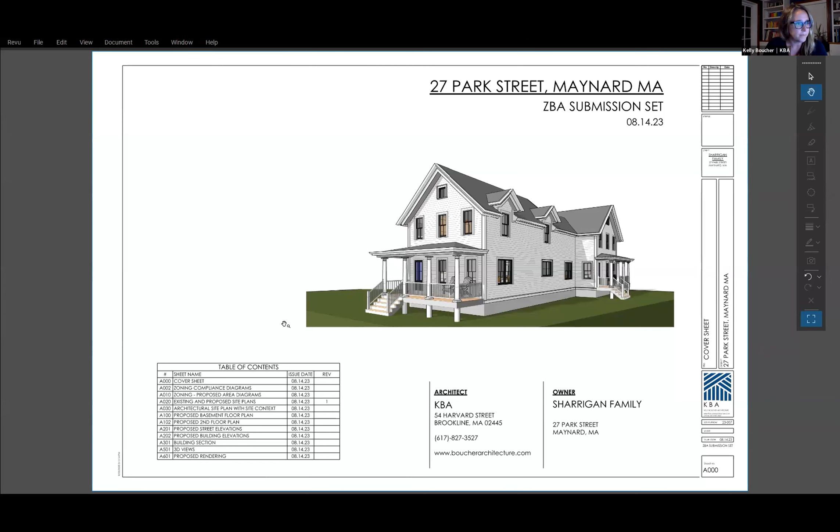So I'm going to start just with a quick zoning review. As you probably all already know, the house at 27 Park Street suffered a catastrophic gas explosion a few years ago that left the house fully almost demolished. It's still there now, but the Sharrigan family has spent a little bit of time working with their insurance agency and all the other parties involved to work out how to build the house back. Now that that's been settled, we're here to present a project to you today.

The existing house was a single family, and it was located at this same corner, 8.3 feet from Park Street and 12.4 feet from Sherman Street. The project that we're proposing to put back uses that same street corner that the house sat at before as the corner of the house. We're hoping that we can reuse the foundation in some places, although the main structure is damaged beyond repair and is not able to be reused. So it'll be new framing, a new building above.

And in looking at the lot, what we are proposing is, besides these two existing non-conforming setbacks, a two-family project that otherwise meets all the intent of the zoning ordinance. So the existing driveway and curb cut remains. The existing garage, which was undamaged by the fire, also remains. And what we're proposing is an attached two-family with one unit that faces Park Street and one unit that faces Sherman Street.

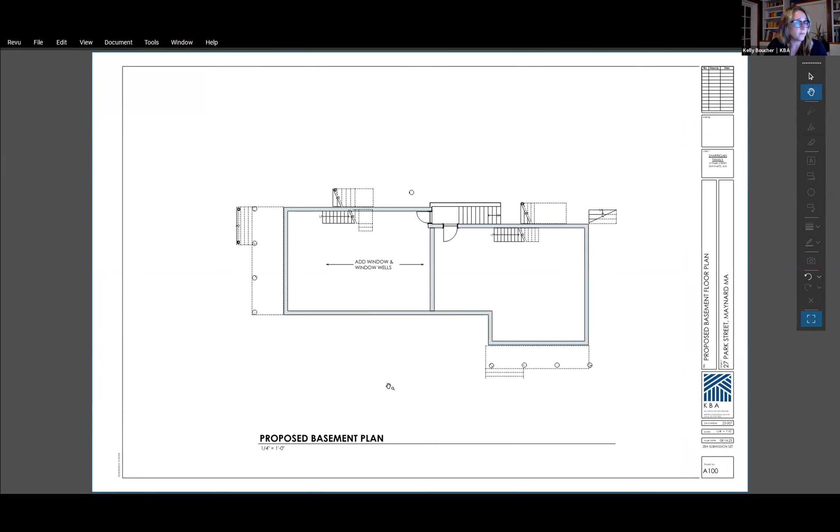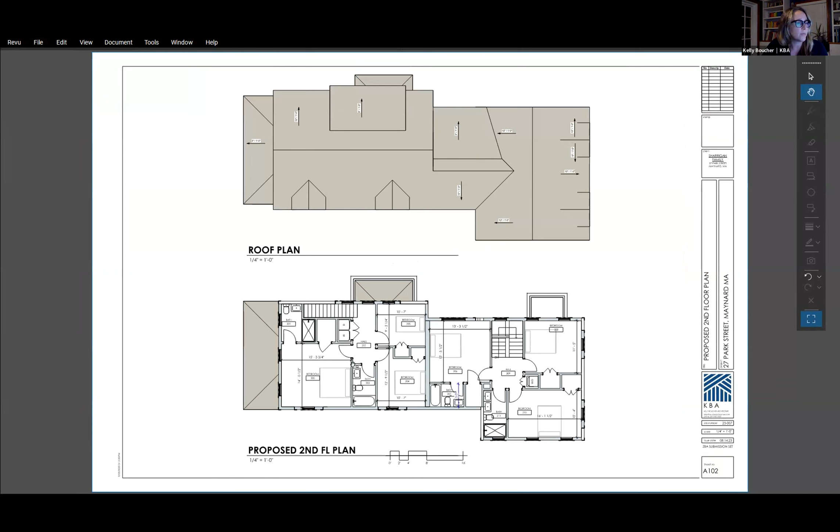We have basement plans, first floor. Each unit is a three-bedroom, with a single family house feel, with all the living space on the first floor and bedrooms above. Here's our roof plan. So 3 bedrooms for the front unit, 3 bedrooms for the back unit.

And here are the elevations. So this on the bottom is what the property will look like from Sherman Street. Here's the front door for the Sherman Street unit, and above is what it will look like from the Park Street side. Here's the existing garage, and this porch is the front porch for the Park Street front unit.

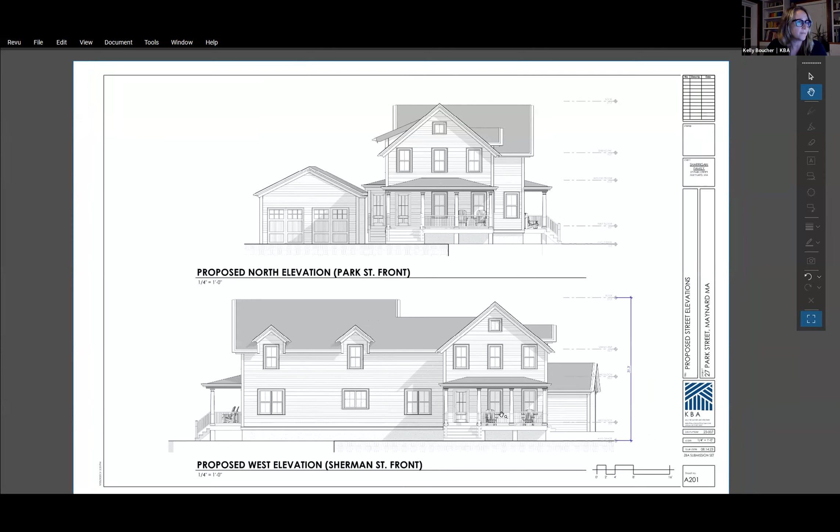We've got the back and the driveway side elevation here. Very residential looking property. A building section and some 3D views of what it will look like, although you won't really get this view much in real life. It's kind of up in the air.

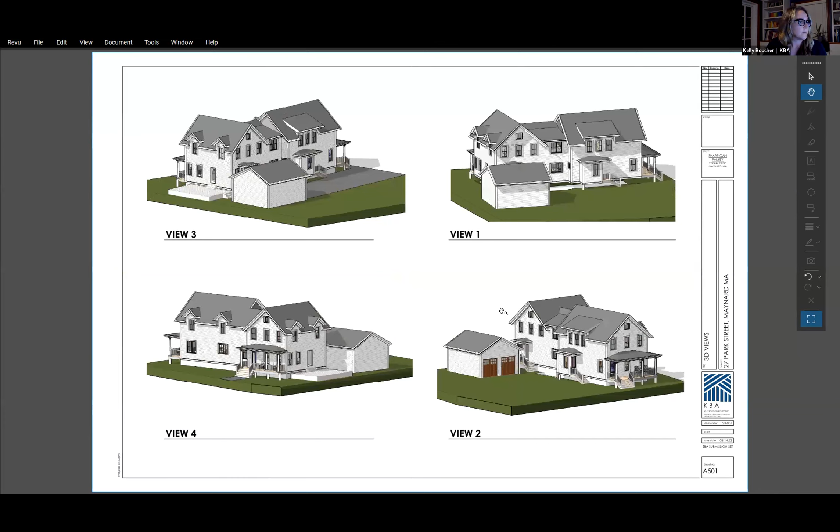So that's what we're looking to do. I'm happy to answer questions about design or zoning or intent. I'll leave it up to you.

All right, and all you're requesting is that setback? Yeah, the building meets requirements for unit count, lot coverage, open space, and parking. Our curb cut is existing. Our side setback on the Sherman side is conforming. We're proposing 17 feet where it requires 15. And then there's actually plenty of room on the other side of the driveway at Park Street, which maintains the lot much as it is today, where that is really the yard for the house. We're trying to leave that the same condition after we rebuild.

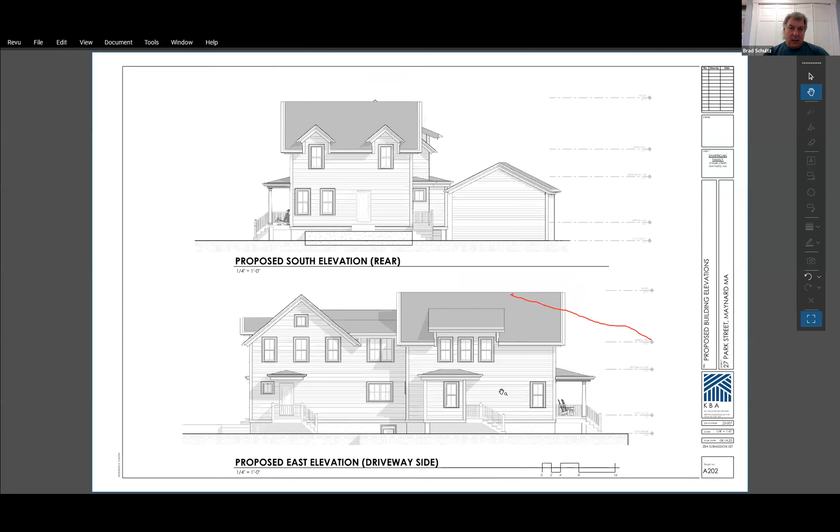Okay, on your basement plans, do you have a ceiling height, or a basement depth I should say, of what you're proposing? I didn't see anything on there. So in the end, we try to get the basement at 7 feet, although we're not planning to use that as living space or bedrooms, it's really just storage. The plan isn't to finish it at this stage, but to leave it as a basement. I don't have the exact answer for you as to what that height is, mostly because I didn't go down and measure the existing one beforehand.

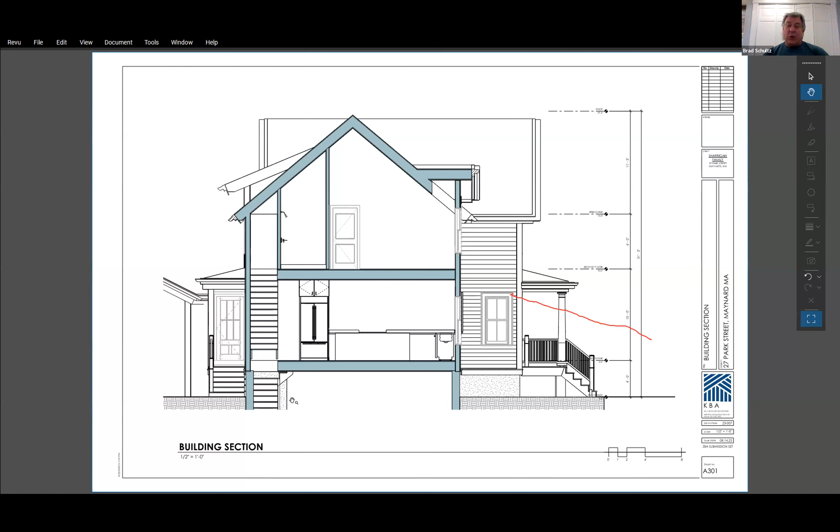Okay, so I guess what I'm getting to is, in the event that you basically have to tear out the foundation, which I imagine you're going to have to, you can make it to the depth you would desire with a poured concrete foundation. So basically you're going to have a very large hole there that you'll pour, starting from scratch, from basically a brownfield, putting in a completely new building. Is that, in essence - yeah, this house is not salvageable.

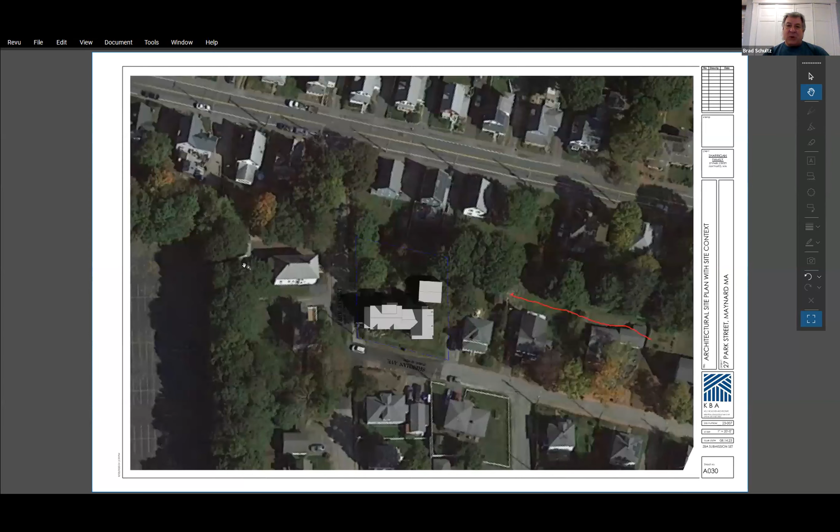So if you're starting completely over, is there any way that you can bring the property or the building back into conformity with the lot? Because you have an 11,000 square foot lot, which is a pretty large lot for Maynard. It seems like this would be the only opportunity to make it a conforming lot, a conforming building on the lot.

The answer is that if we did put a conforming structure on this property, it would be in the middle of the site, which would mean we'd need to rework both the curb cut and probably not be able to save the existing garage, which was one of our goals of the project. It would also make us much closer to our neighbors on the Park Street side.

So to hear where the house is already situated is the least impactful to the abutter on this side. Okay, and the other question I have is the Sherman Street unit. Are you having a curb cut there, or I see you're having steps and an entrance? That's just a pedestrian walkway to the front door, not a curb cut. The Sherman Street unit will park off of Park Street, and then they can get to their unit through their back door, which is next to the driveway.

Okay, and will that have a Sherman Street address? I would imagine that it would, although we didn't get that far for sure yet. Those are assigned by the DPW, right? Yeah, exactly. Sometimes by the post office too, but either way, that's a little further down the road than we're at during our planning stages right now.

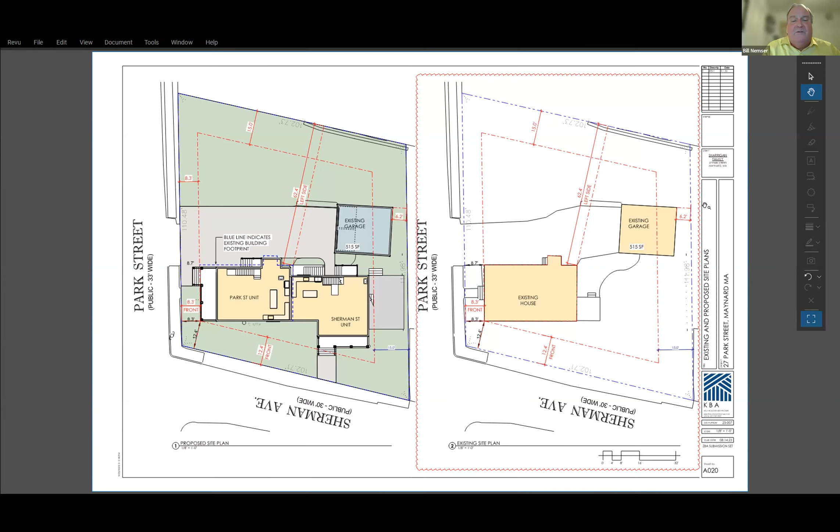And as far as Sherman Street, I'm not sure I quite understand where the... you're saying, maybe I misunderstood it, Paul, but you're saying you thought there was a new nonconformity created? Sherman, right, where the Sherman Street unit is, right there where the mouse is wandering around. Right, that, yes, it's within the same event, but it is significantly different than extending a wall a foot or so along an existing nonconformity. It's significantly bigger than just a foot or so into the setback requirement along an existing wall, which is what we've seen on several cases in the past.

I don't disagree, but I would say that we have a required 25-foot setback, and there was an existing encroachment in that setback. What this is doing, the board can decide if it's too much or not. But I think in the spirit of the interpretations, and what for all intents and purposes is court precedent, it would be an encroachment into an existing nonconformity and thus a special permit. That would be my... Right, I'm not arguing a special permit, that's fine if that's the way we need to go. But I'm looking at the amount of encroachment there that is away from where the current encroachment is, and it's a big event.

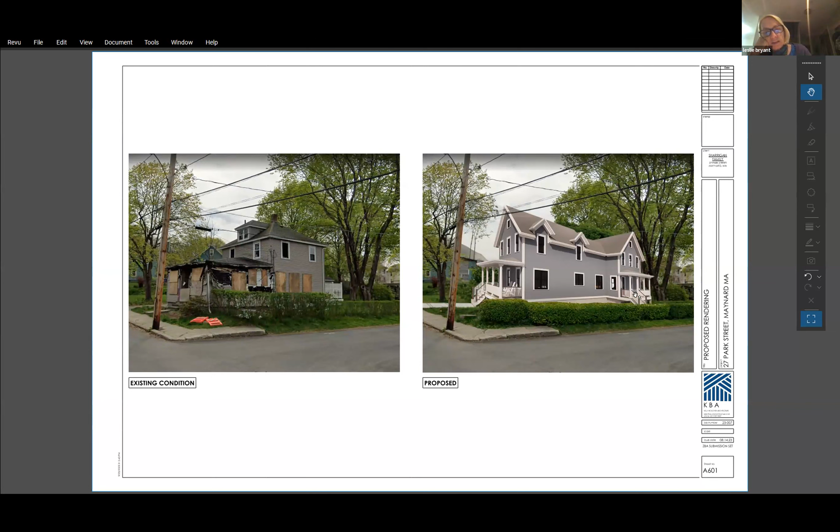I wouldn't discount the fact that Sherman Street, you're not abutting another person's house, you're abutting a street, which makes this naturally a larger distance. The spirit of the regulation is kind of upheld by the fact that you've got a whole street between you and the next property, in my opinion. And our abutter on Sherman Street is even, it's also in that sort of 12-foot line. Their house comes quite close to Sherman Street too, so we're not going to be out a lot further than they are volume-wise as you pass the street facade on that side. Okay.

So I pulled up the, what does Bill affectionately call it? The staff report. And affectionately call it 'stuff', yeah.

You have listed six characteristics that we need to consider: social, economic, and community needs, traffic and parking, public services, neighborhood character, impact on the environment, and fiscal impact. Is that correct, Bill? I thought there were seven, but okay. Yes, I only counted six. All right, you're right.

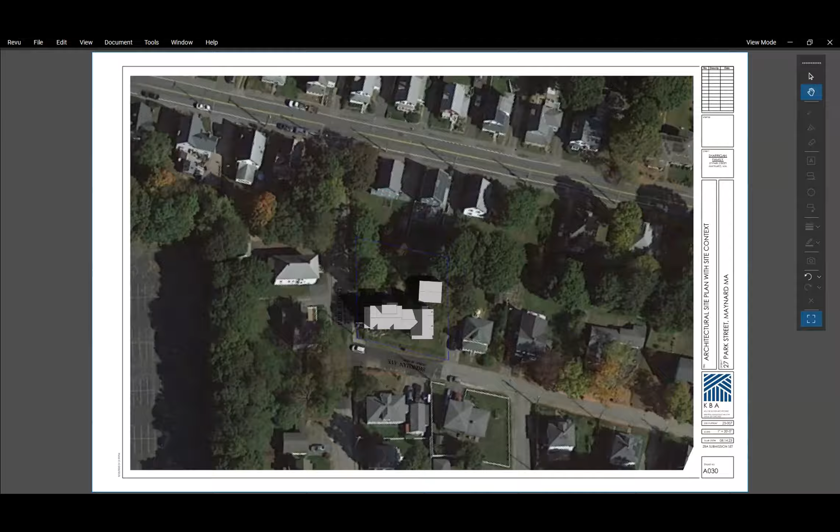So I think that the plans that Jason has put forth really conform to what is already existing in the neighborhood. It's not any closer to the road. And I think for the family, it would be wonderful to be able to keep the garage where it is and how Greg built it. Thank you, appreciate the comments. Anybody else want to speak in favor of the application?

Does anyone want to speak in opposition to the application? The silence is deafening.

So, Bill, what's our protocol now? I just want to make sure I do it right. We should close the public hearing. Have deliberations, I can pop up what we're deliberating on the screen share. But I would say close public hearing, and I think we have all the information, unless the board wants anything else.

That's a good point. Does anyone on the board have any additional questions? I guess I do, go ahead Brad. I have one. Is the plan for this to be an owner occupied property, not necessarily just a rental, or maybe changed, put into condos?

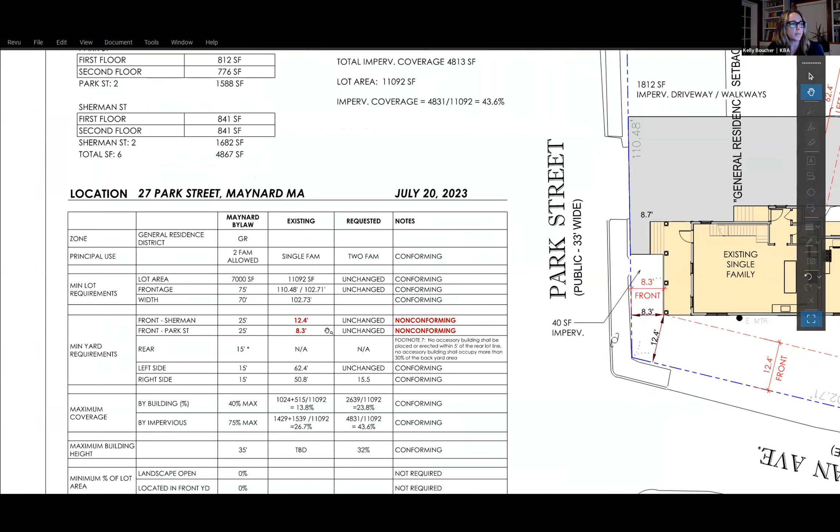So we're looking for a setback. If I can go to that page, their specific request is to go to that diagram. I'm looking for the setback request. Kelly, you can pull that up if you want. Sure, I have it open here. You're going from 25 feet, to 25 feet is what's required. Existing on Sherman Street is 12.4, and we're not looking to change that. That's a nonconformity. And on Park Street, we're at 8.3, and again that's an unchanged, non-conforming existing setback.

Okay, I would challenge it's unchanged on Sherman Street, because you're putting an additional event down to that. So you're extending the nonconformity on Sherman.

My suggestion would be, Mr. Chair, if perhaps the easiest way to do this for the board would be to allow an extension of the existing nonconformity up to, I don't know, what would it need, Kelly, there to be? You're talking about the stairs, where the stairs end there? Oh, are you talking about this little piece, that's Paul's stairs talking about, right? No, oh sorry.

You've got a 25-foot requirement. You're beyond that on the front, on that Sherman corner at 12.4. So you're moving from the 25 down to 12.4, in not an unchanged but an extension of the 12.4 on the front at the corner of the intersection. So you're extending. It's not a requested unchanged, it's a requested extension of the 25 down to 12.4 to get that corner of the Sherman Street porch.

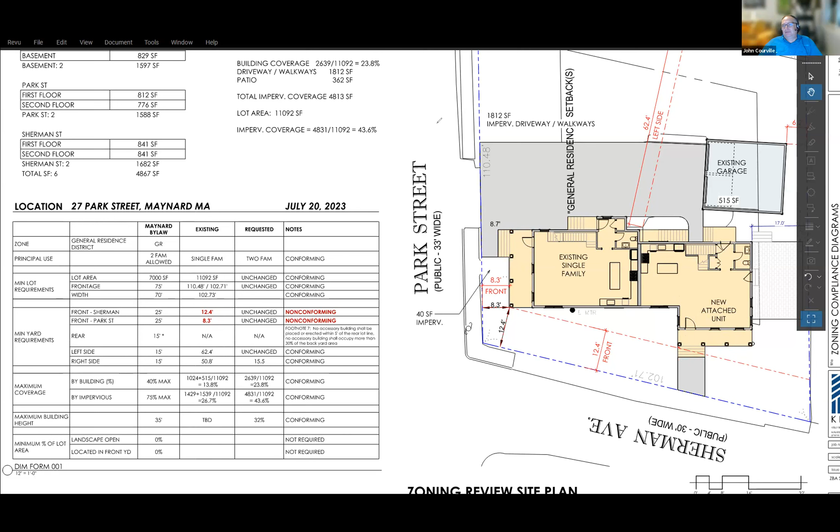Oops, sorry, which is this? It's the same size porch as this one, actually. I think maybe it's the steps that are throwing things off since they're the same color. Yeah, that's what I think. It's not building there, that's the steps, this column. Gotcha, let's see, let me get out of this, see if I can. Here, this post is at the 12.4, this one right here, and these steps are beyond, but they're not covered, there's no roof over them. They could be done out of even stone, they don't have to necessarily be wood construction, they could be sort of landscaping.

This porch is the part that's at the 12.4. So to go back to my point, what I'm trying to articulate, John, is it is not that it is unchanged, it is changed. It's an extension to put in all of that stuff on the Sherman Street front. And so I'm just talking about the phraseology in the request, because if nothing is changed, she doesn't have to be here. The point is, it is being changed to put in this additional nonconformity, extending it from that corner intersection there on the corner of Park and Sherman.

Would it help, Mr. Chair, if the applicant, so if they're going to extend the existing nonconformity, and I'm sure Kelly can come up with a number that is not to exceed, would that be acceptable? Well, the 12.4 she's been saying, and I'm fine with that. What I'm just clarifying is it's not an unchanged event, it's a new nonconforming within that 12-foot setback elsewhere on the property, that's the Sherman Street front. So all I'm debating here is the terminology, that it is an extension of the nonconformity, not that it's unchanged.

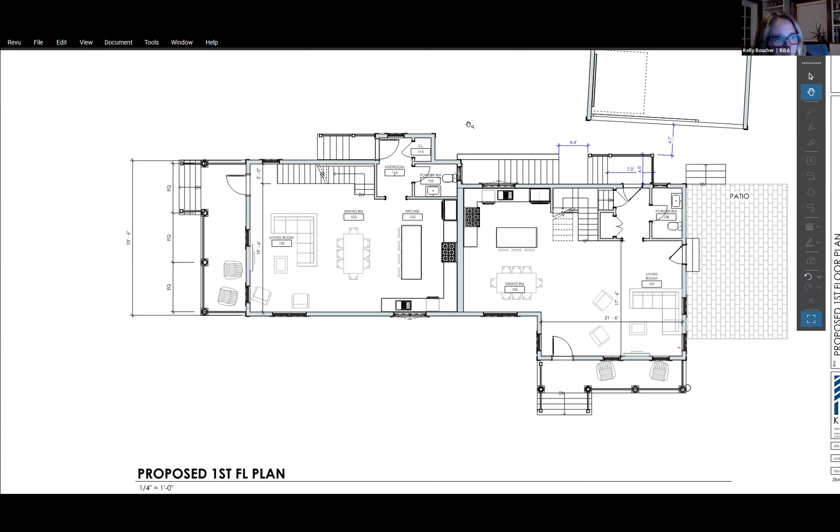Because if somebody reads that and says, why bother being in front of the zoning board because nothing changed? Well, something did change. It's a new or an extension of the existing nonconformity. So we're proposing a new addition, non-conforming for front setback, that is not a greater non-conformity than is already existing.

Well, it is a little greater, isn't it? No, not worse. We're not closer than the 12.4, which is the existing number, but it's new construction.

A new addition, I guess. And you're claiming that stairs don't count? Yes, because on both ends of the building, you have stairs trespassing into the 12.4. Yes, and the house did have stairs trespassing into the 12.4 on the Park Street side beforehand.

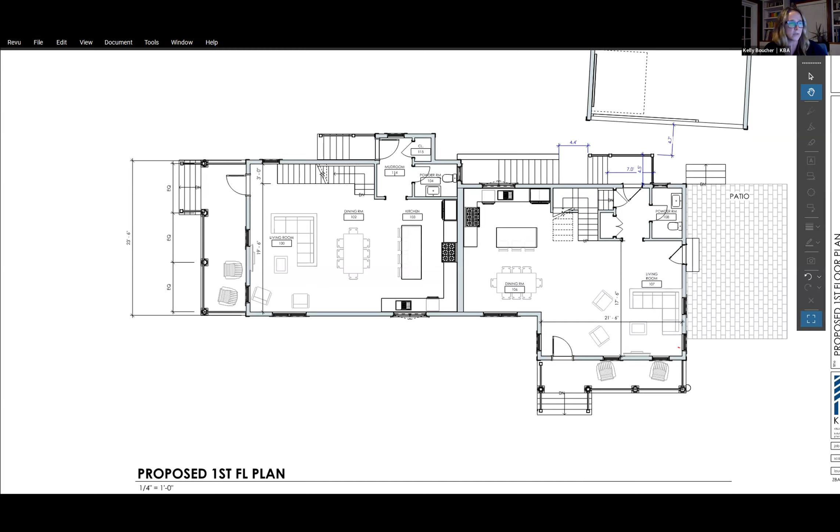That was the number from the site survey, which I assumed to be the correct setback number based on the survey, which I do have here somewhere. Here, there it is. So we moved the stairs a little bit closer to the driveway just because we changed where the front door is, but the existing stairs already do come past what is noted as the setback on the site survey.

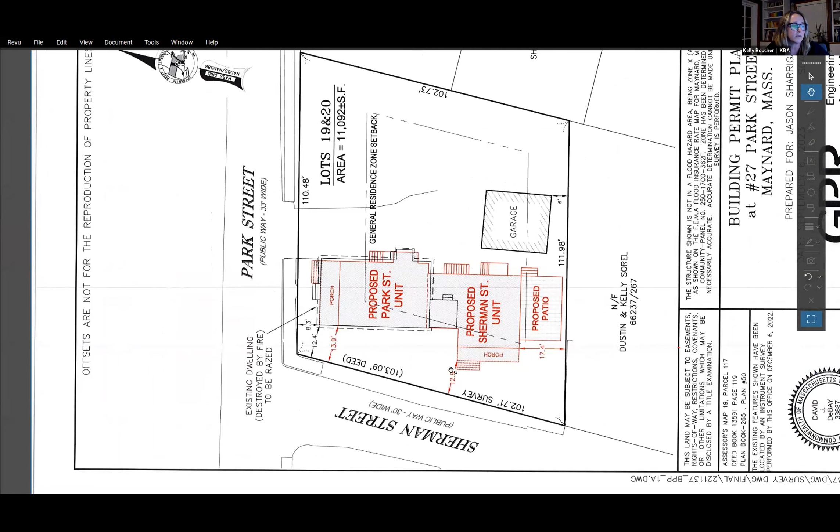All right, you've got a new number here, 12.9 on the Sherman Street stair corner. The 12.9 is correct, it's a little bit further off. See, if you look real close, the red line is the 12.4 and we're like a little teeny tiny bit off. So yeah, that's true. The 12.9 on the site survey is a correct number based on the computer drawing.

All right, I think the safest and neatest way to do this, Mr. Chair, please. You have two existing nonconformities. The building commissioner will say that the stairs do count as a structure, but the applicant's entitled, it doesn't change anything because of the special permit.

Probably the best way around it and to meet the bylaw and to take care of the applicant's request, we need to request the board could grant a request to extend the existing nonconformity into this setback by X amount, or not to exceed X amount. That way it gives the applicant the ability to construct the stairs, which really fall under the special permit, but it gives the board the security of tidying it up nice and making for a neat explanation of what occurred during the hearing.

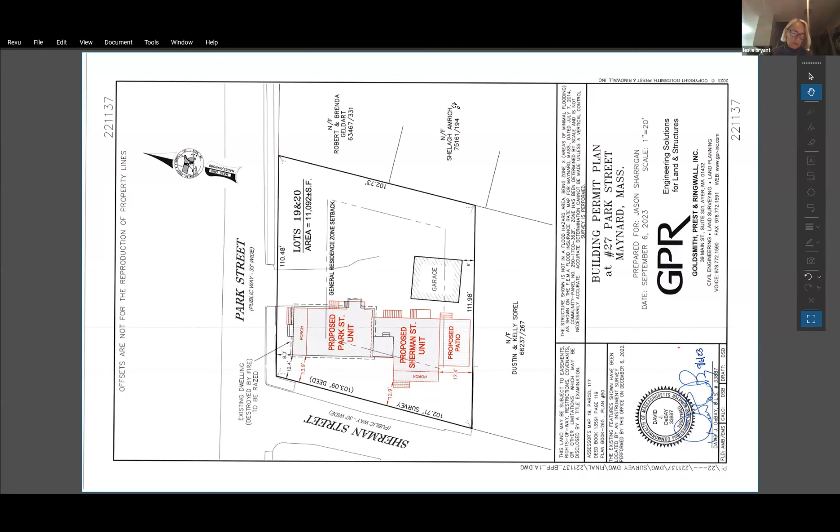There's a permit, so we're looking for the procedural statute, the way it was worded originally. Can you see the screen? Oh yeah, okay, well you just have to tailor it. So I make a motion to...

I make a motion in favor of approving the special permit to allow a second residential unit to be constructed and attached to the existing structure at 27 Park Street, that will encroach into the front setback as depicted in the petitioner's application, dated August 24th, 2023.